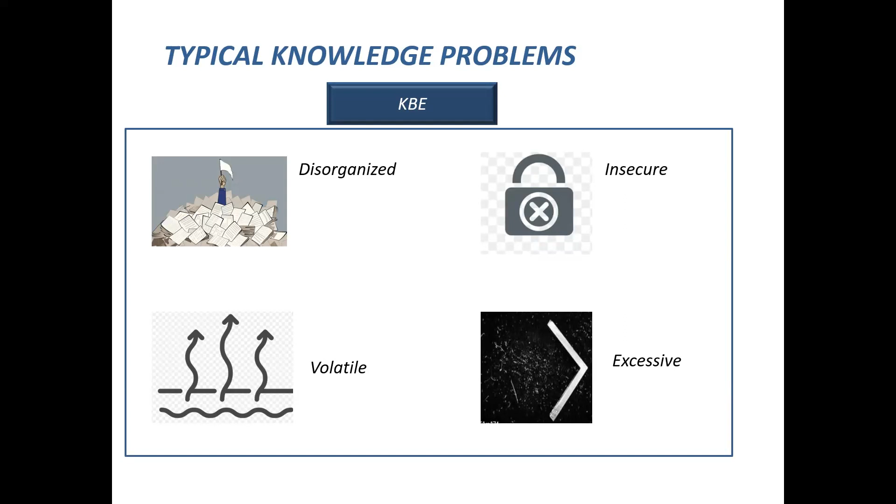So knowledge based engineering aims to encapsulate all these problems into a structured system, and it aims to address these problems and minimize the difficulties arising from them.

Now, what is KBE? There is no one definition of KBE. If you look around on the internet, you'll find very little literature on what this actually is. We have a few research papers that have come up with definitions, so we have multiple definitions from multiple perspectives.

Some people say it's a computer system to aid the product development process, and it takes the place of domain specialists, the people who know the domain and are experts of it. It minimizes their job, or rather eases their job. It's a computer system, KBE, which helps in the creation of products to ease the job of human experts. This is one definition from one perspective.

Some people also say it's a means by which the processes of the company can be translated into software. Every company has its own huge processes. A person who shifts to a new company takes 2, 3, 4 months just to understand the processes of the company. Although the technology is same, although the domain is same, each company has its own custom processes. So translating those processes into software, to ultimately save money and time and have good engineering and manufacturing scale, is what KBE is all about.

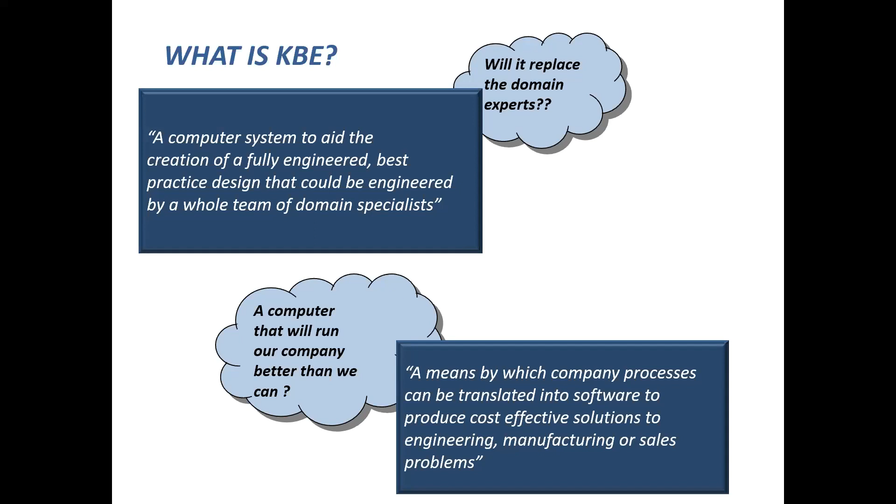Again, when you say a company's processes can be translated to software, will it mean a computer will run our company better than we can? Again, the answer is no. The computer is there to improve your efficiency, your time, and to help avoid errors and improve your accuracy.

Now, a bit of history, from where it came. It all started when the word AI, artificial intelligence, was introduced decades ago - a computer software which does not only solve the regular problem whatever you program, but is intelligent enough to learn from mistakes, apply common sense from previous data and previous knowledge, to solve problems which are not explicitly programmed.

In explicit programming, whatever you program, according to that you get results - they say garbage in, garbage out, right? So that is the traditional kind of programming we have. AI does not do that. It learns from its previous knowledge, has algorithms to learn, to train itself, and then predict results for data which is not explicitly programmed.

So when AI came into the market, the traditional product development people who used to design mechanical components - it can be automobile pistons, engines, crankshafts, safety systems, all the traditional automobile components, or machinery like bearings, nuts, bolts, as simple as that - these people into traditional product development started to think of ways to employ artificial intelligence to address their design problems.

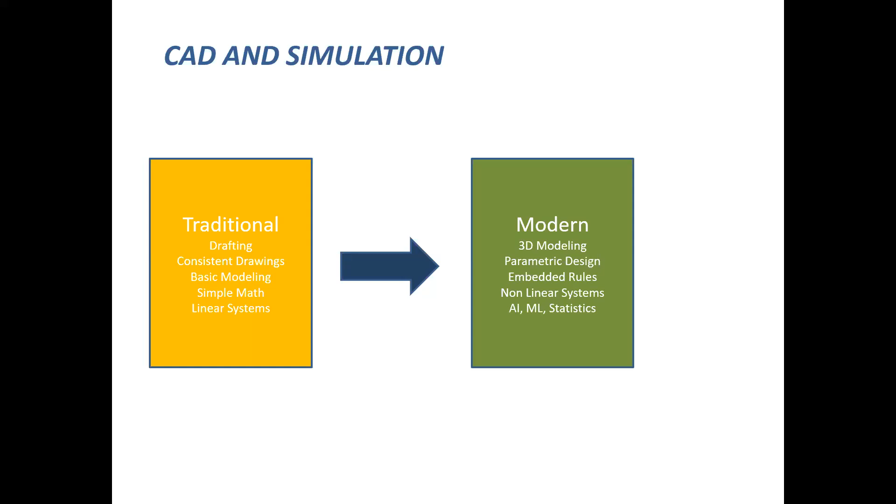So KBE is again a collaboration of cross functional domain experts, and they come together through a computer system, and that computer system can be used to optimize the solutions we deliver as products. Product is a solution for a specific problem, and to come up with that product we have a computer system, made by a team of cross functional experts.

So to make that computer system you need experts who know the domain knowledge, who know the sensitivities of the system, the science of the system. You need people who know how to translate that physics or that science into a computer language. The computer understands programming, it has its own languages. So you need a team of computer people, computer experts.

You need a team of people who know how to package. Once you make a system, once you make a software, you have to also deliver that software to clients who can use it easily. It has to be user friendly, easier to use for the people. So you need people who can do the packaging - that is where the DevOps team comes into the picture. So it's a combination of a lot of cross functional experts to make a structured computer system, which can ultimately be used by the product development or design engineers.

This image, what you see here, this is a typical workflow of any KBE system. This is the user who ultimately uses the KBE system, and the user is typically design engineers who work on modeling, who work on simulation.

Instead of doing the simulation and modeling with their own hands, with their own mouse and keyboard, they use this KBE system. So it has a user interface through which the user can actually interact with the KBE application.

And this knowledge base is the heart of any KBE system. It has got all the knowledge about that particular process, or that particular product. For example, in the next slides you will see gear design. Gear design is a complex thing, and it has got a lot of geometric factors, a lot of mechanical factors.

So all the knowledge pertaining to gears, all the limitations I told about, the empirical formula, the empirical factors, which is obtained by years and years of practice and hands-on experience, all that is dumped into this knowledge base.

Now this inference engine is a really important thing. The user interface gives a certain number of user inputs to create that product, and the knowledge base has the capacity to create the product. Now, according to the user inputs, which knowledge base to use, which equations to use or not use, which factors to use or not use, is basically decided by this inference engine.

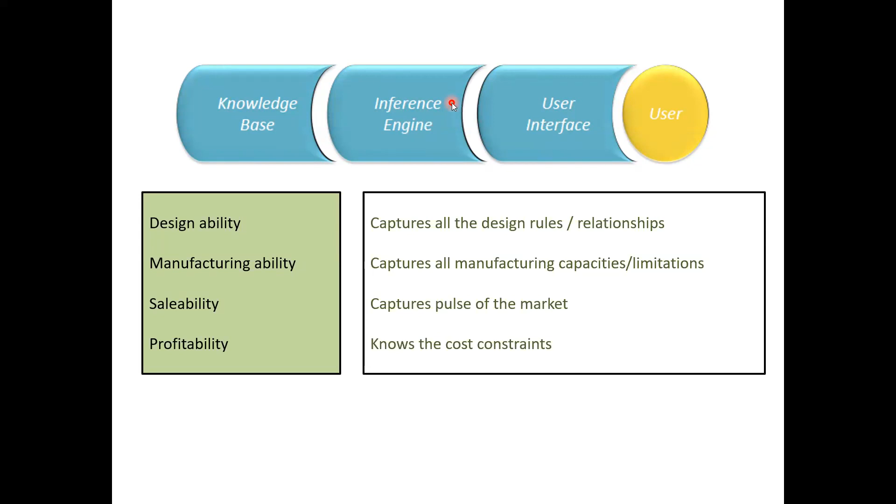It increased the time engineers spend on creative tasks, and plus it saved time. And literally, I'm not exaggerating this, it literally saves time from days to minutes.

It saves time, for example, to design a product. Let's take the example of gear again. To design a gear without any KBE system takes hours, anything between 10 to 12 hours for a medium level expertise design engineer to properly make a model of it, to design it with all the rules and all that.

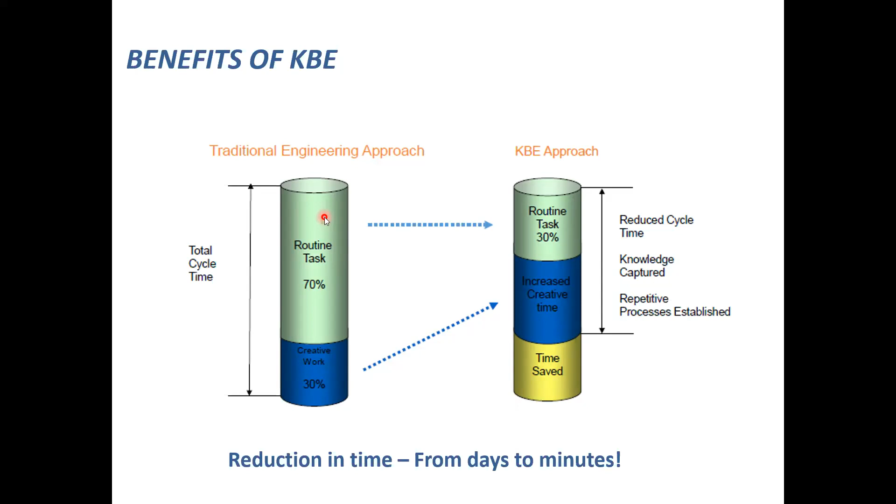Now in a KBE system, you just have to put in the inputs and see for yourself on the screen. It designs the product for you in less than 1 to 2 minutes. Again, if you have a good system, good processor, it can be faster.

So how does it work? In the KBE lifecycle, you identify what has to be the KBE application. Because in the product development lifecycle, you have a lot of steps: concept generation, designs, and then modeling. You do the modeling or design on CAD softwares.

Now in CAD softwares, there are certain tasks which are repetitive. For example, you work on certain models and have to create 100 models of the same kind. So these can be automated, or in these we can apply knowledge-based engineering to reduce the redundant work.

So first you have to identify again, and then you'll have simulation works. And in simulation works also, you have three things: pre-processing, solving, and post-processing. In pre-processing, you have meshing and all that. We have softwares for automatic mesh generation.

Again, you have to identify. So the whole point here is to identify what process can be a good candidate to apply knowledge-based engineering. Not everything can be applied with KBE. You have to first identify and then rationalize.

So why is this really needed? Why should this be created as a knowledge-based engineering system? How much time is it saving? How many users of this process are there? If we save, say, 5 minutes for each user, how much time will be saved? And that translates to how much money. So all these whys and hows, ifs and buts have to be

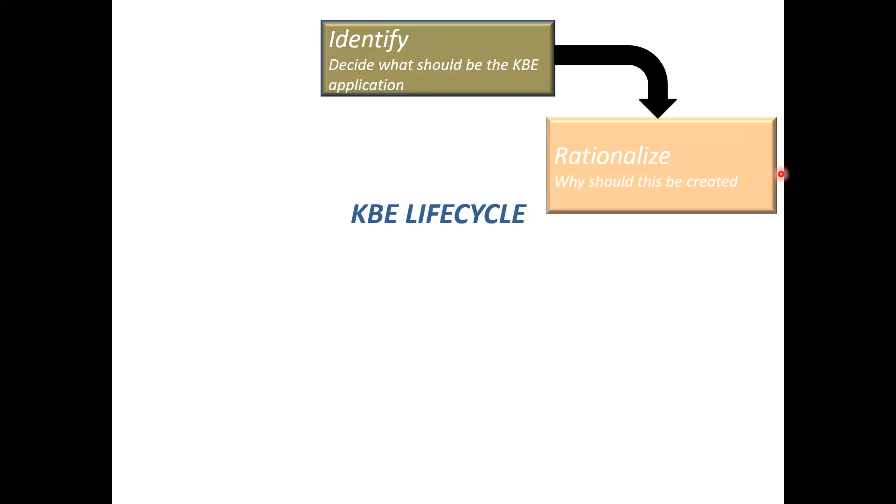done, and then consolidate and finalize the requirements, design, software architecture, and cost. Then implement: actually sit and create the tool, code the tool, and test it with extensive testing, to make sure that it's giving the same result and same accuracy as what you would have got if you had done it manually, right?

And then you create a package of all these dependencies, because CAD tools have a lot of geometrical and physical dependencies, so that people with no background in programming or computer science can actually use it.

And then you deploy it on the user environment, on the customer's systems, and train the people on how to use it first. Make the people appreciate it, tell them the advantages of it, tell them how much time it saves, and then train the design engineers on how to actually make use of this efficiently.

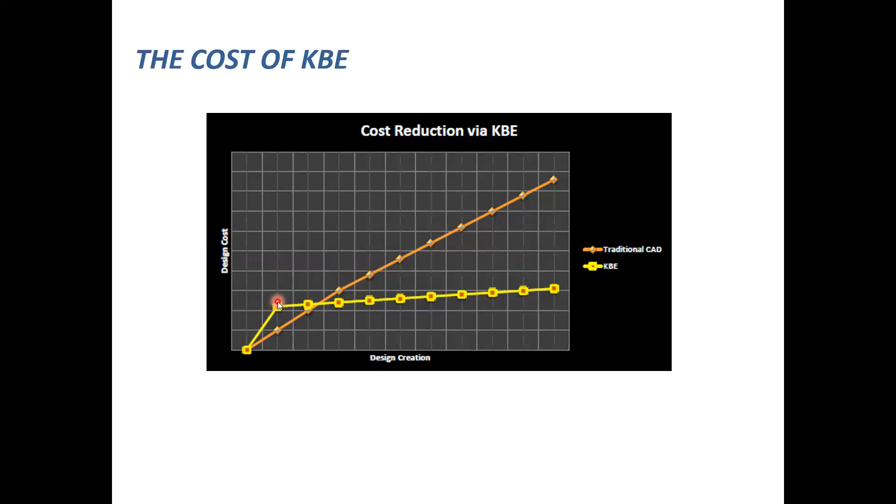So if you see, in traditional product development, you have a linear cost. As the time to create more complex designs increases, the design cost keeps on increasing. But for knowledge-based systems, the initial cost is high, because this is where you finalize the software requirements, involve multidisciplinary people, involve mechanical, civil, electrical, or electronics engineers as domain experts, and then involve computer science people to do the coding, or do cross training to train computer science people to understand the mechanical part, or train mechanical, electrical, civil people to do the coding. So all this involves a bit of high cost, but over time, the cost of design comes down.

A few applications of how it can be used: one is to automate routine tasks, as I told. For example, you have a plate and you have to create 100 holes on that plate. For some applications, especially stamping kind of applications, you have a plate and you have to create 100 holes. Now in traditional CAD, you can actually go to the 100 places, click on the command to create a circle or a hole, give the dimensions, and create 100 holes by yourself.

Otherwise, create a small software KBE program, wherein you just specify how many number of holes you want, and what should be the distance between each hole, and click OK, and just see for yourself 100 holes getting created. So this is called automation of your CAD processes. This is one of the applications of KBE.

Second is your customization also. When you get softwares from big software vendors, you get NX, you get CATIA, your company buys it, procures those licenses, because all these softwares are highly costly and come with a license and a cost. But you need some capabilities in that software according to your product, because the companies which make the software keep in mind the general industry and make the software. You will need to customize that software, add few commands, add few processes to suit your company, to suit your processes.

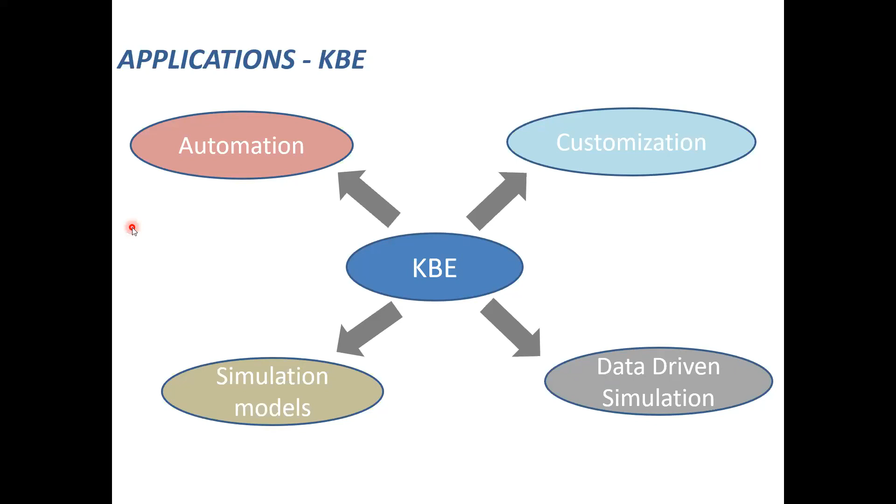All right, so these are a few applications of knowledge-based engineering, a few case studies. I have three case studies - one for simulation, one for CAD, and one for other applications like civil engineering, electronics, and stuff. So this is a case study.

What we developed - we had worked on this particular software to create an automated tool for end-to-end simulation. If you see this image, a car and some poles around that car is the setup to test the noise of the car, exterior noise of the car by experiments. This is performed in highly controlled environments in specific labs, government labs in India, and a very few private companies have this facility because it comes at a huge cost. So to test how much noise comes out of that car, you have to have this track, a particular road, and these poles are all microphones.

Okay, you have to keep these many microphones and drive the car at a particular speed. We have a government standard to test this car, published by the Ministry of Road Transport, called Automotive Industry Standards, AIS. So AIS 152, 142 — these are all the standards to test the noise of the car.

This can be experimentally performed, and if you have to change the microphone position or the speed of the car, all that has to be done iteratively. At once you can only test the noise for one setup. If you have to change the speed, you have to change it and perform the test again. So it's an iterative process, more costly, takes a lot of time. This test takes days together, typically.

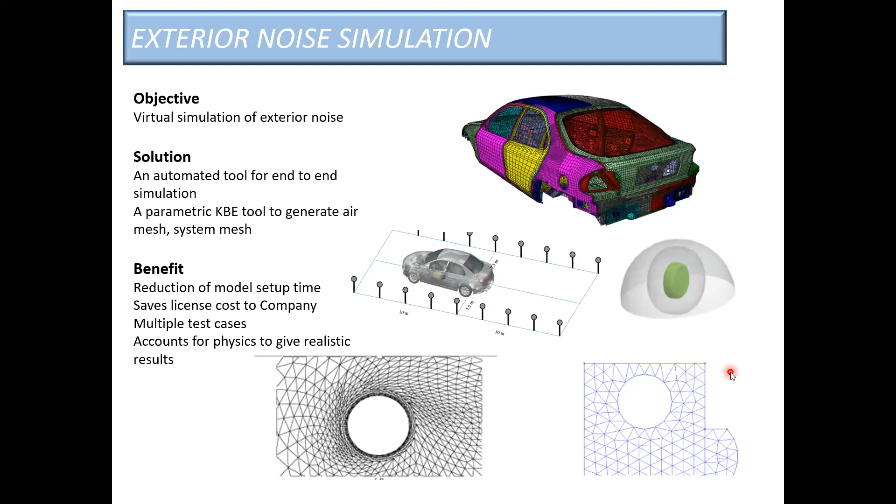So this is how it helps to reduce the modeling time and reduce the cost to the company. Multiple test cases, as I told you, can be handled this way, and it also accounts for the physics. These simulation models take into account the physics of the sound, the physics of noise, in order to give realistic results. Of course we will have some error — every simulation, every virtual prototyping you do, definitely has some error, but those are engineering accepted errors which will not affect the performance of the product on the whole.

Now the second application is the gear application. So this is the gear you create, and this is the application — a knowledge-based application, and this is the user interface (UI) of it. If you don't have this application, the user has to do it manually: create this circle manually, create the gear teeth manually.

Again, it's redundant work. Once you create one gear tooth, creating the other gear teeth is all redundant work. It doesn't require any engineering expertise — it's just a waste of time for the engineers, but it has to be accurate. If you don't have it accurate, manufacturing will not be good. So to address all these issues, we came up with an application to actually create these gears automatically.

All the user has to do is give the inputs and click OK, this green button, and see for himself how it all works. I have around a 30-second video for this — let's go through it. You can see how this gear is working, how the creation of this gear happens. This is the user interface, which captures all the parameters: the addendum, the radial addendum — these are all the physics behind which the gear is designed — the number of teeth you want, the pitch of the teeth, the width, and everything.

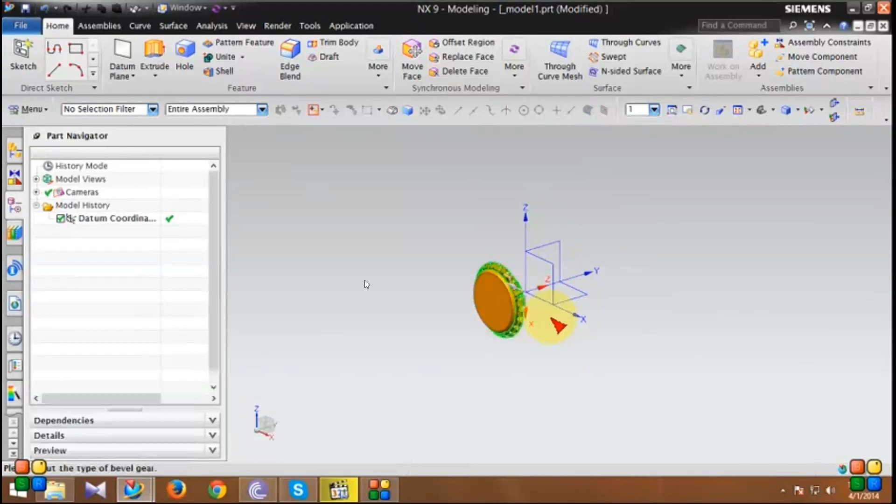All right, so I hope you saw how that gear got created automatically and how those teeth got generated on that surface automatically. To have done that manually would have taken a lot of time, plus it's prone to errors. The distance between the teeth should be only so much — if it is offset by 2-3 mm, it creates problems for manufacturing. So this is how it addresses this redundant work problem.

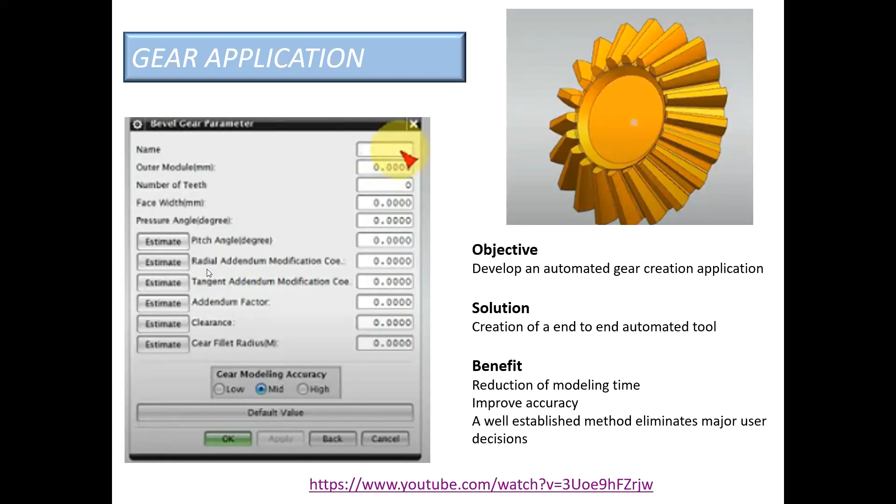Now, the advantage of these kind of simulation models, computer based simulation models, is if you have to see what effect your viscosity has on your torque, you can just change one value of viscosity and run the simulation. It will give you a different value of torque.

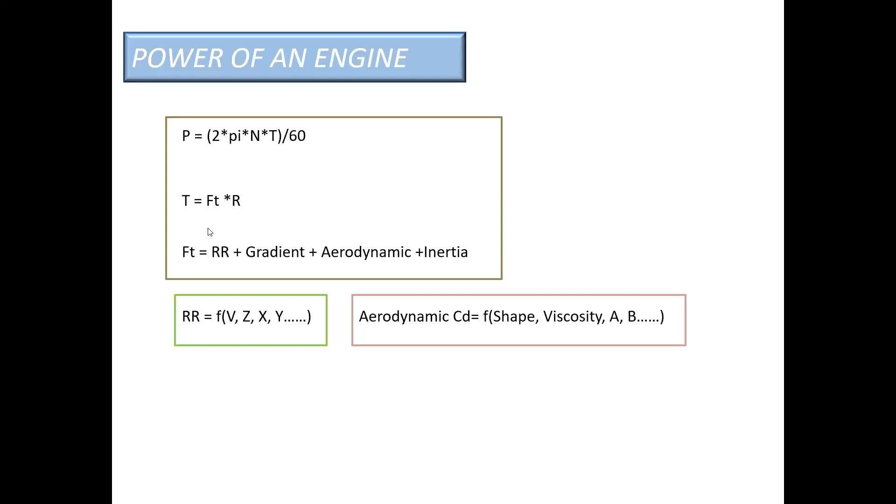Okay, so all these studies, comparative studies, can be done to come up with more efficient product development. Now a few examples, all these examples till now were for mechanical oriented products, mechanical engineering. Now we've got a few examples for civil engineering and electronics also.

This concept of staircase, the design of staircase again can be automated. And we had a tool, this SDST tool, which was developed by a set of people as a research tool, mainly to expedite or to improve the time for the staircase design process.

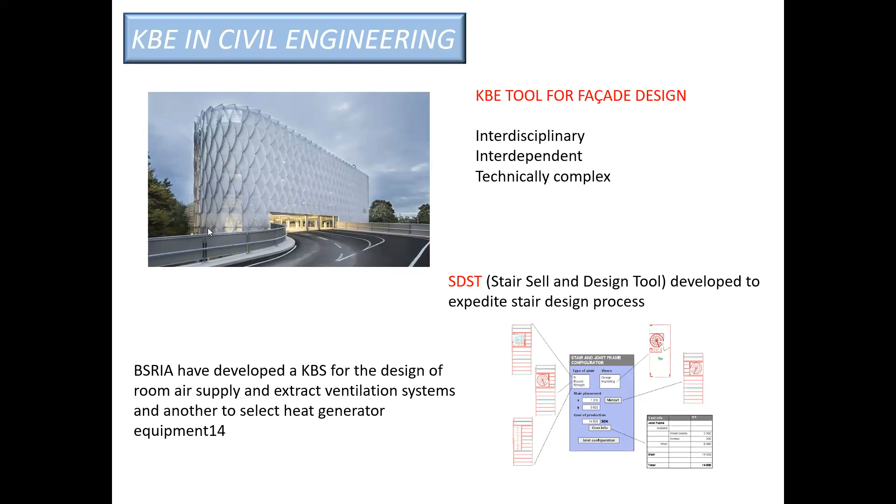Again, you have one tool to design the room air supply and to extract the, it's mainly dealing with the MEP systems, AC and ventilation systems and all. Again, one tool to study how it all impacts the design of that particular AC and all that.

So this is how this knowledge based engineering is embedded into these ECUs. And that ECU is again a part of each system, because every part of the car is connected to an ECU. You've got the electronic control unit, again we've got tire, in tire you've got these sensors, and again it has got this ABS, anti-locking brake system.

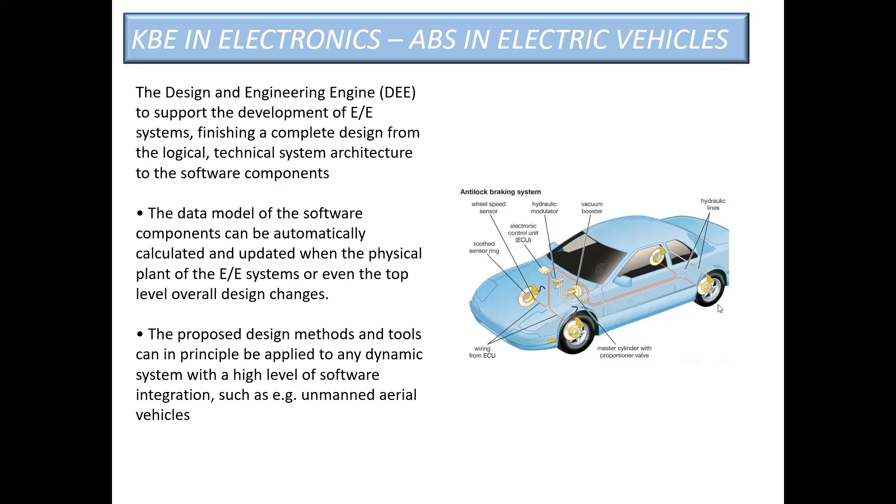Again, ABS is nothing but an algorithm or a set of equations and some logic to actually tell the car when to brake, when not to brake, how much to brake, and all that. So again, this knowledge is embedded into these cars through these KBE systems.

You can pick up, instead of C++, take up Python, VB.NET. This is a technology called CAA, which is very specific to CATIA and Dassault Systems product. Again, NX Open is very specific to NX. Again, you can take up MATLAB. You can call MATLAB from your ANSYS, or from your Siemens, and all these are famous product development softwares in the industry.

You can take up any of these products and then take up one of the programming languages, combine both, and you can start making your small KBE systems. Okay, how do you make a career in KBE?

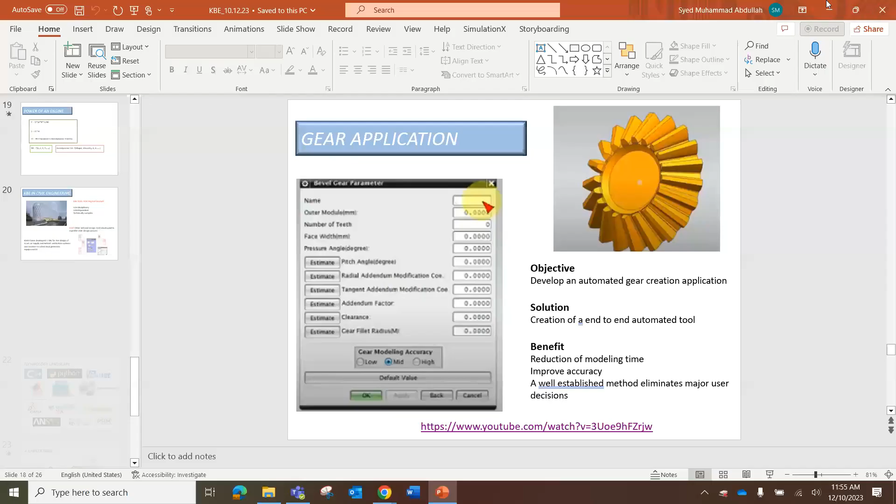So this is a very promising career prospect for people who are working on traditional simulation and CAD, to learn a little bit of programming, come on the back end side of how these softwares are made, because they have very good hands-on experience as a user, as a designer. Now they can come to the back end with some programming skills, and start to develop these softwares.

The companies employing these skills are of two or three kinds. One is the OEMs, companies which actually make products, automotive OEMs, aerospace OEMs. They buy products from software vendors and have to customize them, and to customize, they need KBE people. Second is service based companies, because they get products from these big OEMs and tier 1, tier 2 suppliers, and then deliver products to them.

Third is the software vendors itself. Companies like MathWorks, Ansys, Dassault, these kind of companies need people with programming and mechanical skills, or people who are experts in the domain. So it's a wide range of opportunities, also a good technological landscape, and good research opportunities, because it's a very upcoming and new area. A lot of prospects for research.